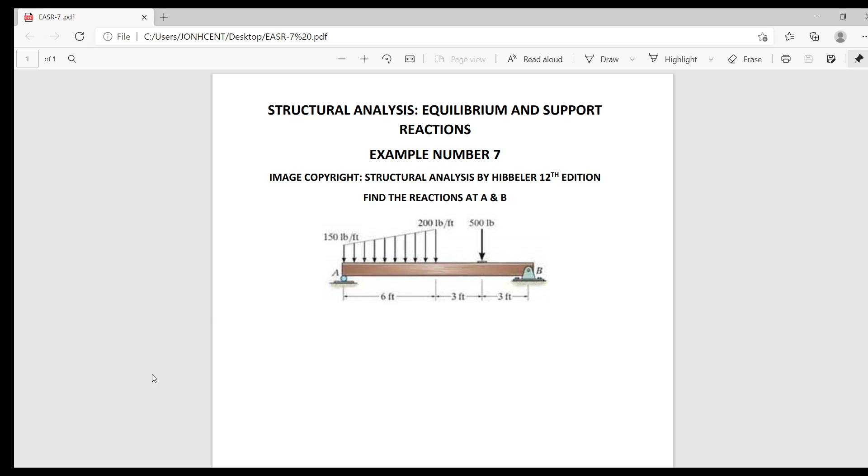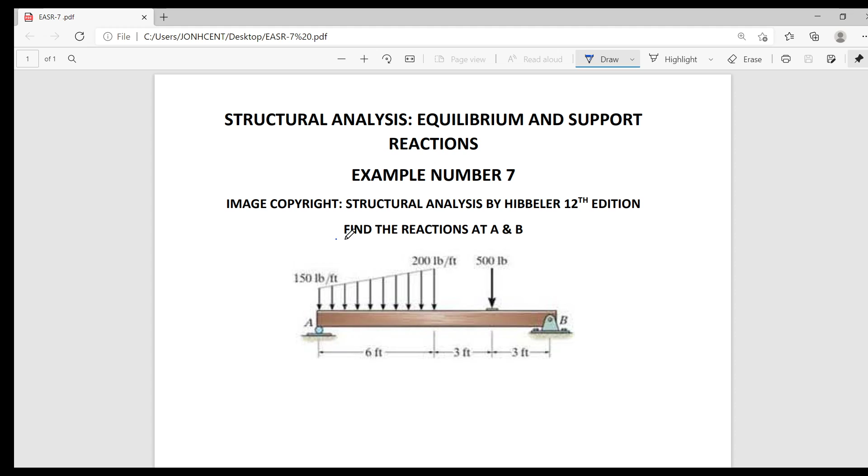Our topic for today is about the structural analysis pa rin. We have the equilibrium and support reactions. Okay? So, we have this setup. This image was taken from Structural Analysis by Hibbeler 12th edition. So, we have to find the reactions at A and B pa rin. So, we have this trapezoidal load and a point load.

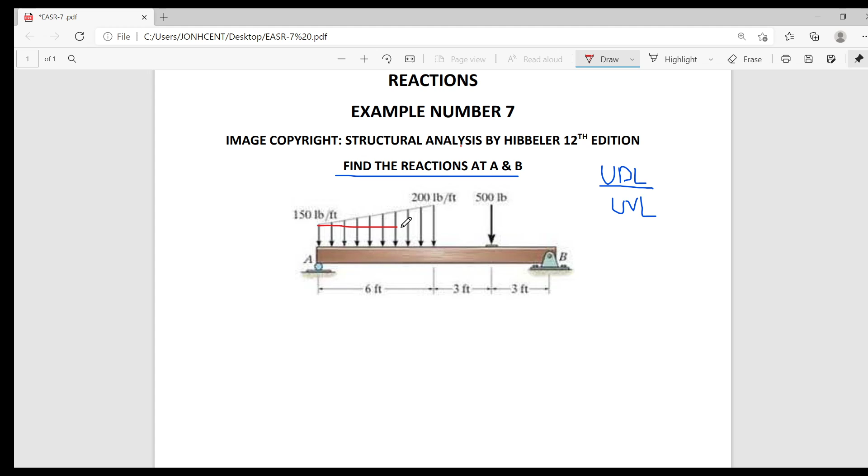So, always remember that this trapezoidal load is composed of UDL and UVL. When we say UDL, that means uniformly distributed load. Okay? Then after that, when I do this, ginawa kong box yung isa or rectangular. So that is your UDL. Then, etong triangular sa taas, this is UVL. So, ang taas ng 150 is for the UDL, then 200 kay UVL mo. But that's not the end here.

Because when you do this, yung triangular load mo, hindi na 200. You should subtract it by the load of the UDL. So, that is about 50 pounds per foot na lang because 200 minus 150, that is 50. Right? Then, yung UVL mo ngayon na 50 pounds per foot, gagawin mo na siyang point load.

So, katulad lang sa previous video, we have 1/2 times base times height. So, that is 1/2, your base is 6, then 50. Your point load is now 150 pounds. Ito na yung gagamitin natin sa UVL. Si UDL, hindi na natin gagalawin. Okay? So, proceed na tayo sa moments.

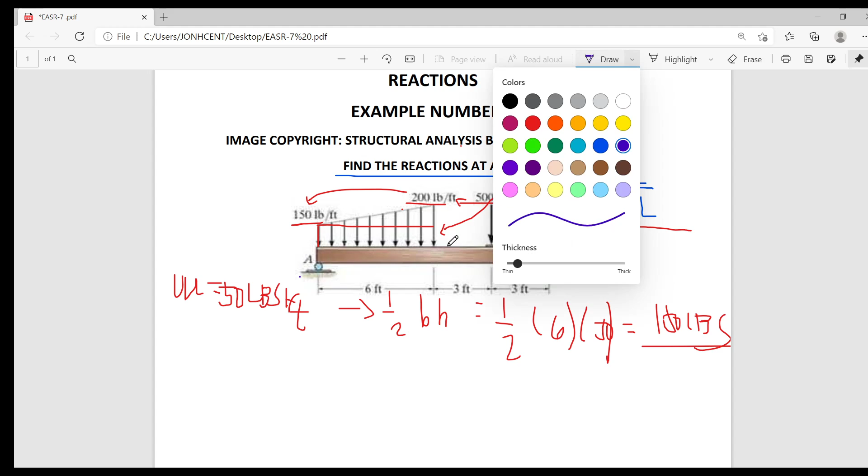So, summation of moment at A is equal to 0. We have clockwise is positive. So, we have 9, 12. So, we have negative 12 BY. Inassume ko na si AY pa-upward, si BY ay pa-upward din. Pwede nyo namang ilagay sa baba ng drawing what are your assumptions.

So, negative 12 BY plus 150 times 6 times 3. Just a gentle reminder, etong 150 times 6 times 3, this is your UDL. Sa A ka nag-moment, nakadikit siya. So, 6, kalahati niya is 3. Plus 150.

150, yung point load kanina na dating UVL, times 2/3 of 6. Okay, so ito yon. Yung 150, hindi na siya 200, 50 pounds na siya. Then, this is somewhere here. So, ito ay 2/3 of 6, plus 500 times 9 is equal to 0. So, ang makukuha nating BY dyan ay

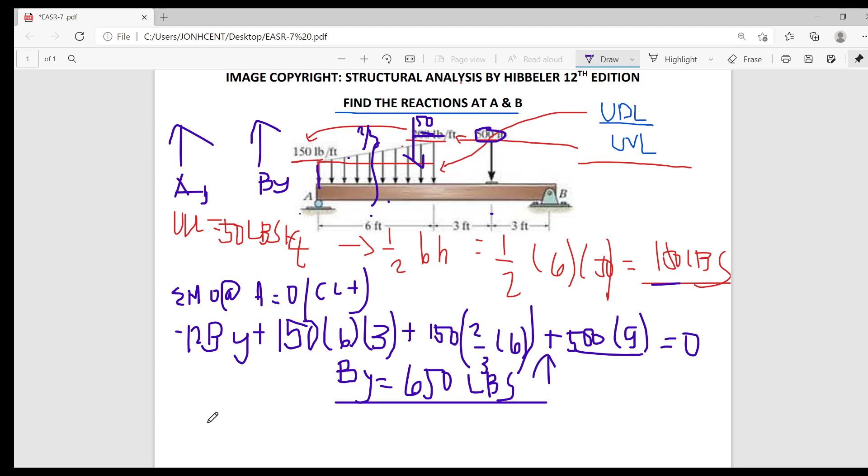pounds. A reminder, itong 500 times 9, this is the point load mong 500 times its distance from A, which is 9. So, that is upward. So, mag-moment naman tayo at B. Summation of moment at B is equal to 0. We have clockwise positive.

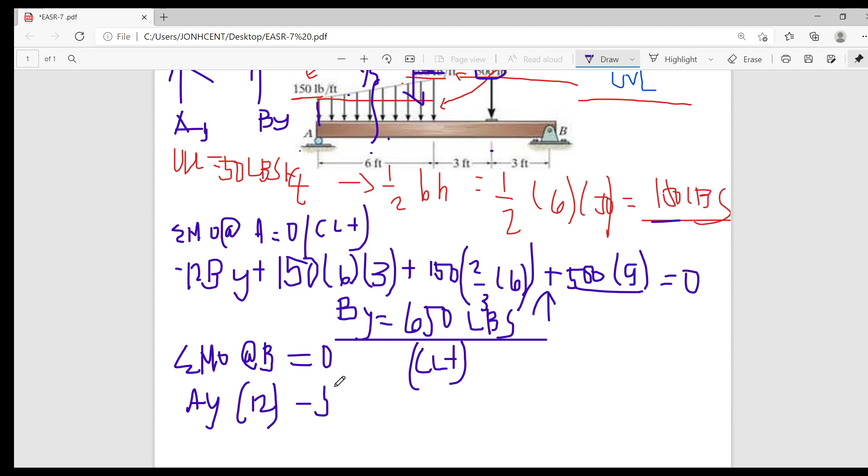So, that is AY times 12 minus 500 times 3. Ito yung ikot ni B, clockwise. Iikot si 500 ng pa-negative. So, 500 times 3 minus 150 times 1/3 of 6 plus 6, minus 150 times 6 times 9 is equal to 0.

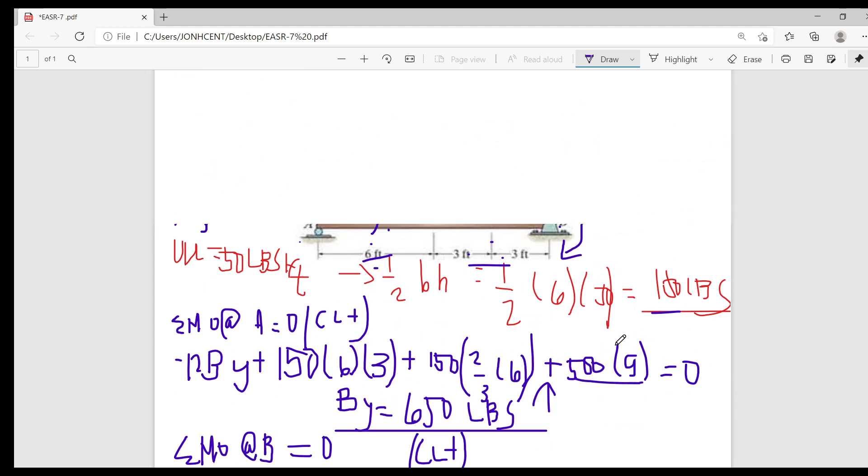So, explain ko muna itong isa. May 1/3, so triangular siya. 150 times 1/3 ng 6, since nag-moment ka, may 6 feet ka pa na distance. So, 1/3 of 6 plus 6. Kaya siya naging ganon. Minus 150 times 6 times 9, ito yung UDL mo. Kalahati ng 6 which is 3, plus may 6 feet ka pa mula sa B. So, 3 plus 3 plus 3, that is 9.

So, calculate natin, that is AY times 12 minus 1,500, direct ako na ha, minus 150 times 1/3 of 6 plus 6 uli. In-explain ko na kanina, minus 150 times 6 times 9, equal to 0. Shift solve.

Okay, ang AY natin ay 900. So we have 900 pounds, and that is upward. So, ayan yung forces natin. AY is 900, then BY natin is 650. Obviously, if you analyze the beam, mas maraming loading ang nakalagay malapit kay A. So, siya dapat yung may pinakamalaking resist. So, 900, unlike kay B na 650 lang.

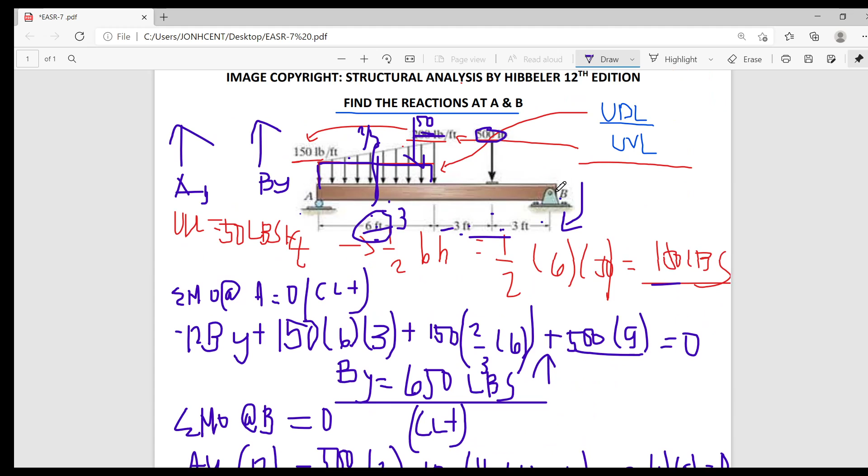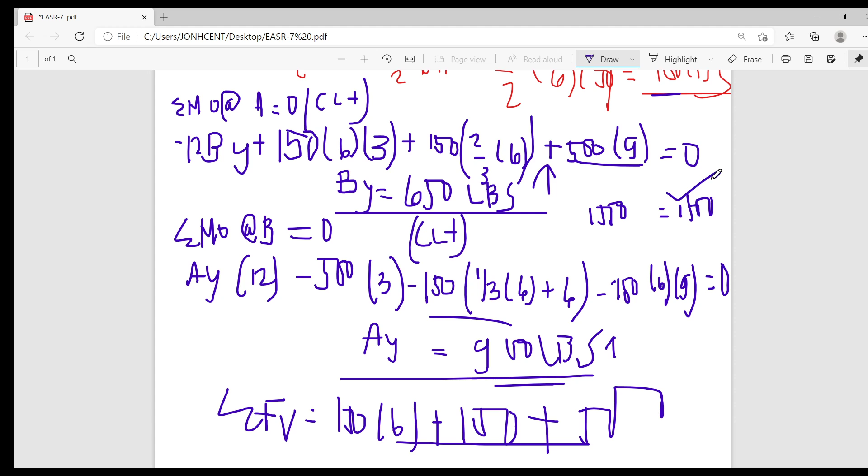I-total mo lang uli yan using summation of forces vertical. So that is 150 times 6 sa UDL plus 150 plus 500. Dapat ang total niyan ay 900 plus 150 plus 500, 1550. Kapag in-add mo yung dalawa, 900 and 650, 1550 is 1550. Therefore, our answers are correct. So, that's it for example number 7 in equilibrium and support reactions.